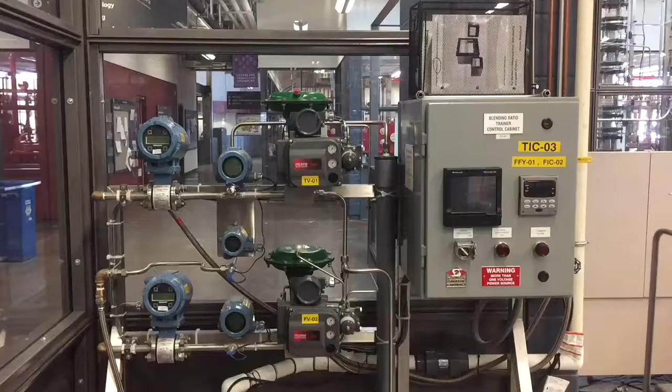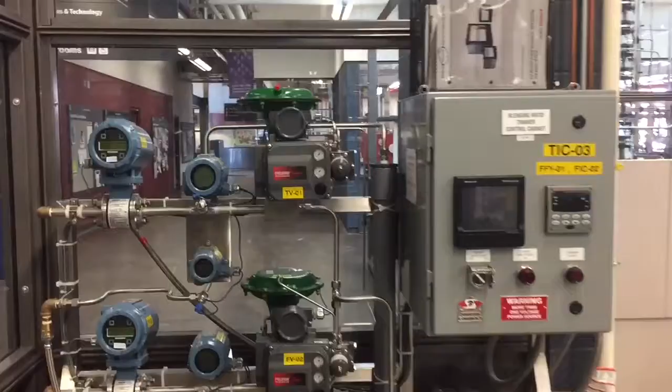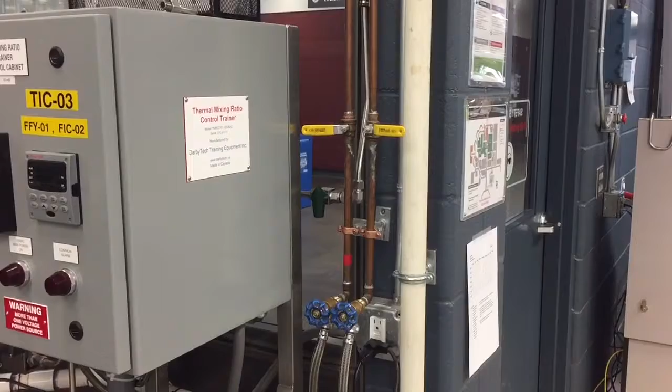This is the pre-lab video for a ratio control lab at the Red Deer College. I want to step through the process on this ratio control trainer that we have in front of us. If I move over here to the right, you can see we've got these two copper lines running down, one for hot water and one for cold water. That's what this trainer is going to be doing. It's going to be mixing hot and cold water and controlling the temperature of the mixed stream out.

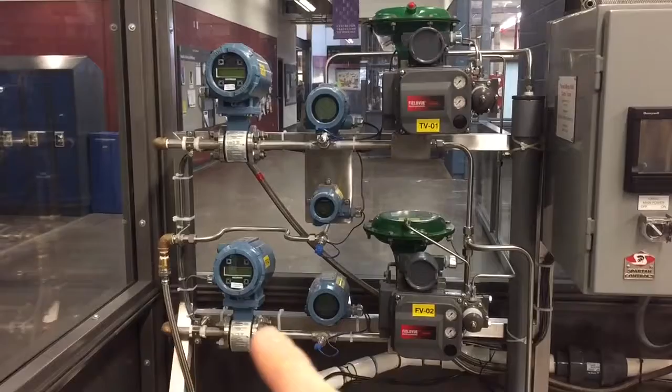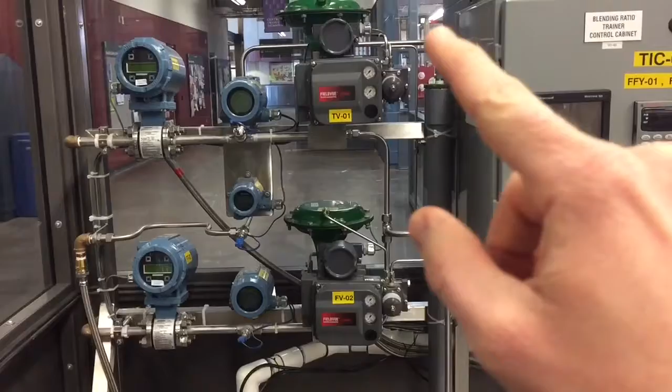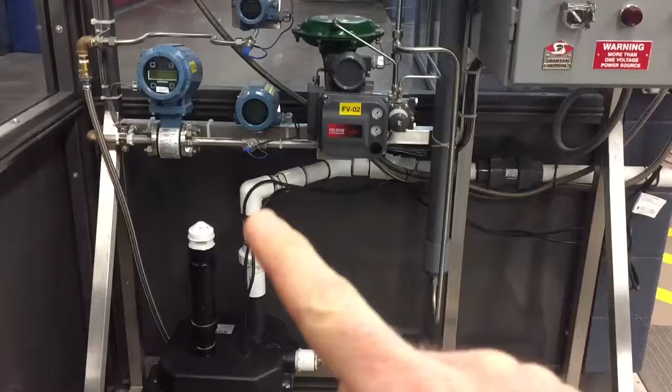So these two lines, you can see they flow down and over to our trainer. Let's walk back over here just to have a look. The hot water comes in over here and mixes down here, and the cold water comes in down here and then mixes with the hot water. So this is the mixed out. The mixed flows down into this 2-inch PVC pipe and then back over here and down, and the temperature is measured by this transmitter right in the middle, flows down and then exits down into our sump pump and then is discharged out over to a drain over in another part of the building.

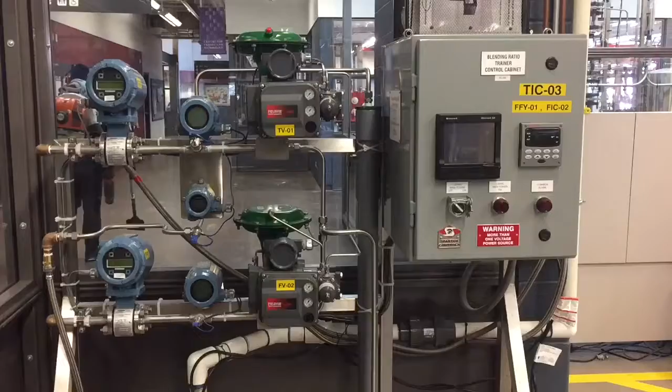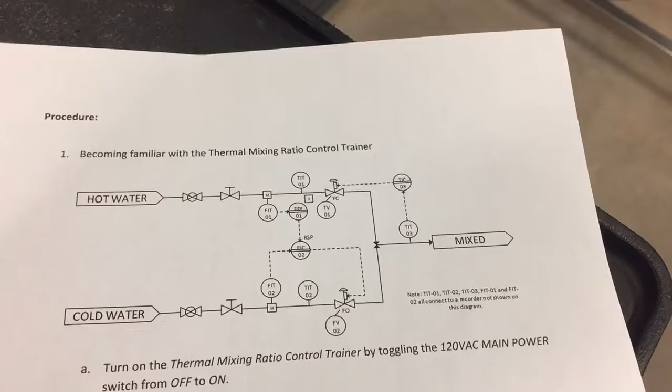So let's quickly look here. We've got two control loops that we compare on this trainer. We have both a feedback and a ratio control loop. It's comparing to see the benefits and to see how ratio compares to a feedback control loop for the same process. So what I have here is page 2 of the lab. We can see we've got our hot and cold water coming in and then our mixed exiting over here. Right here is our feedback control loop, and all of this right here is our ratio control. So we compare the two. We basically disable the feedback control loop, use ratio, and then disable the ratio control loop and use feedback, and compare the two strategies to each other.

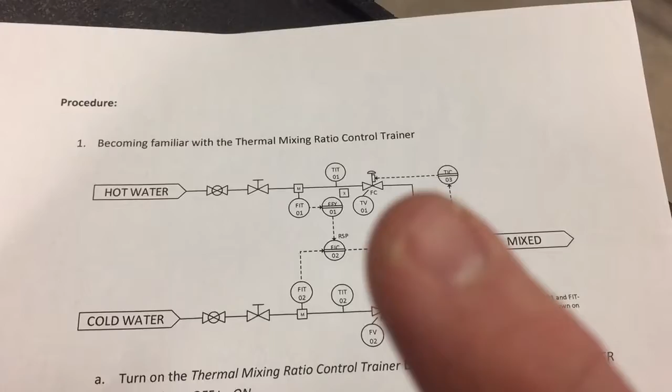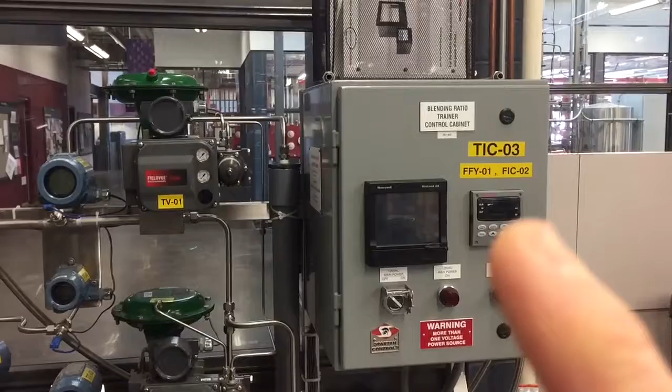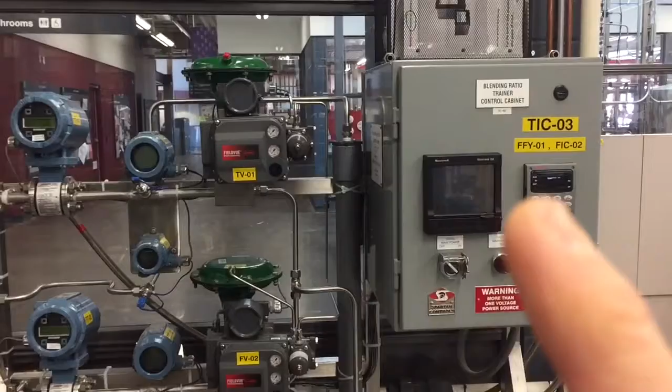So let's quickly identify these two loops on the trainer. We've got TIT3, TIC3, and TV01. So TV01 is right up top here. This would be the valve for the feedback loop. TIC03 is in this controller. This Honeywell controller can handle more than one control loop. You can see it also handles FIC. It has an FIC02 and a TIC03. And then the transmitter for the feedback control loop. So this is our valve, this is our controller, and then our transmitter for the feedback loop is this one right here, which is TIT03. You can see right there. So that identifies our feedback control loop.

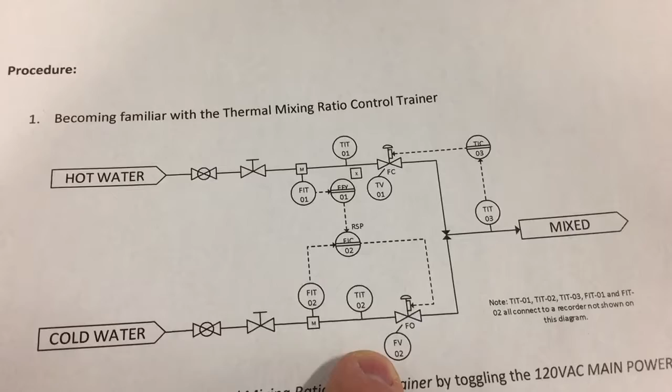Let's have a quick look now at our ratio control loop. We've got these two flow transmitters, and they have an M there that represents their mag flow meter. We have FIT01, FIT02, we'll need to find those. FIC02, I already identified, it's in that Honeywell controller. And then our valve down here, FV02. So let's point out all of these. We have FFY01, this is a multiplier block, and this is where you're going to be entering your ratio for ratio control. So this will take the flow rate, multiply by the ratio, and figure out a remote set point for FIC02. You'll be doing this all in the lab.

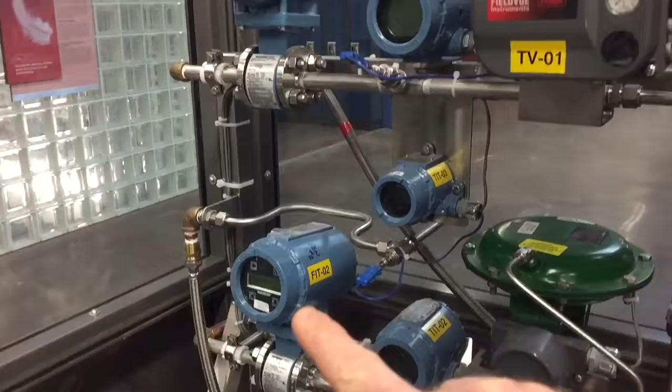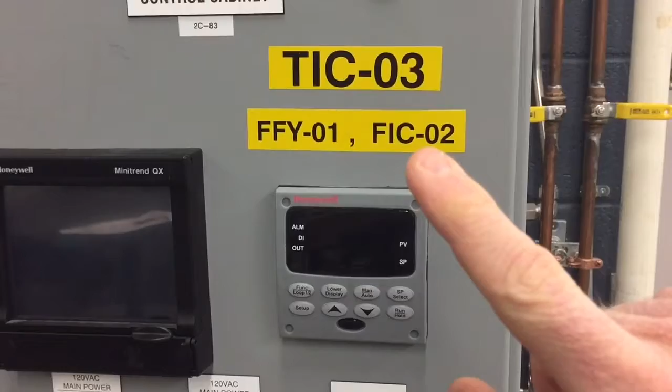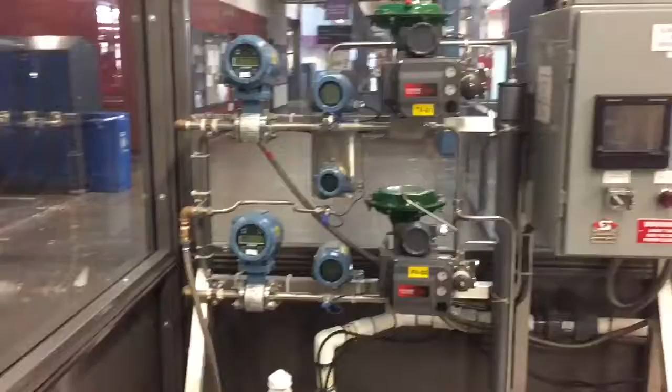So just back over here, you can see our valve for the ratio control is down here on the bottom, FV02, and our two flow transmitters, we've got FIT02 and FIT01, and our multiplier FFY01 is going to be in this controller along with FIC02 to figure out a remote set point, give it to FIC02, and it's going to try to control the flow down here in the cold stream. So there's technically 3 streams here. We've got one with hot water, one with cold water, and then we've got our mixed out.

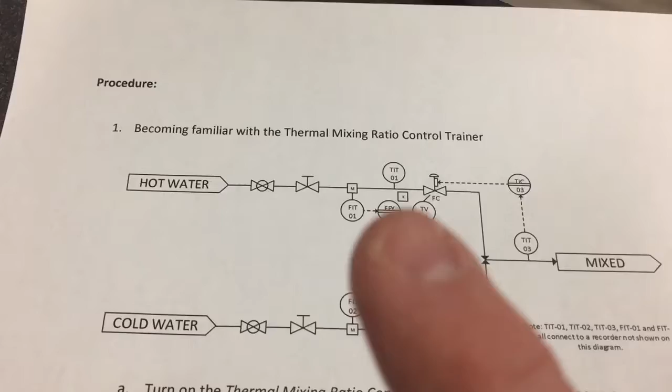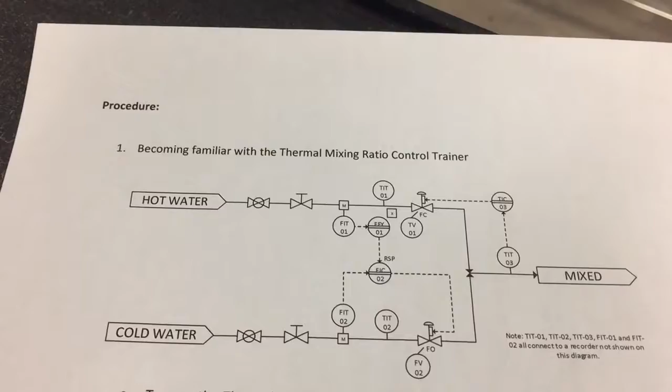In ratio control, typically this stream up here, the hot water, would be classed as the wild stream. The reason why they would call it the wild stream is because there's no actual control loop on it. If we got rid of the feedback, ignored that, there would actually be no control loop, no valve on here, nothing to control the flow, so it could fluctuate, and that's why it's termed wild. Down on the bottom here, we have this control loop right here, so we can control the flow. So this would be the cold water. That stream down here would be called the controlled stream. So we have the wild stream up top, controlled stream on the bottom, and then our mixed stream exiting.

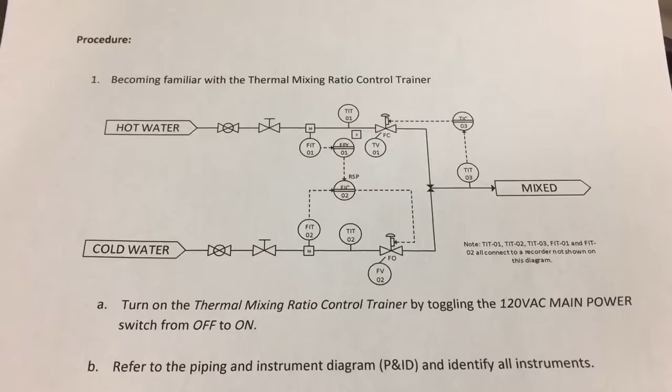So there'll be some questions in the pre-lab questions to answer in regards to the process that we've just gone over here for the Ratio Control Lab.